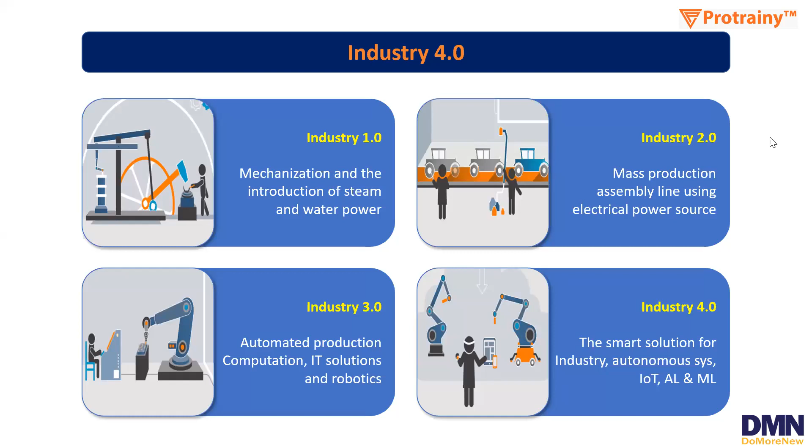Moving to the next slide. What sort of solutions are provided under Industry 4.0? We need to find out what solutions are available. That is ICT, information and communication technology, which comes with augmented reality and virtual reality. Then unmanned aerial vehicle, which comes with drones and other things. IoT, Internet of Things - by using internet, you can do a lot of things.

Renewable energy, like producing electric vehicles, making motorized machineries and everything. Then robotics and automation, big data and cloud computing, like using Google's cloud services, Azure cloud services - they come under this big data and cloud computing. Also Amazon web services and everything.

Then this 3D printing part, where we can print composite materials, lightweight and strengthening products from filaments, plastic filaments - that's called 3D printing. Then also the high-end simulations.

Someone saying something? Okay, let me continue. So then we come with - hello.

High-end simulations and analysis also comes under Industry 4.0 solutions, where we can do a lot of simulation, strength analysis, flexural strength, tensile strength, shear stress, and everything by only giving inputs, not by using real machineries. We can find out what sort of strength are applied on the body - proper UDLs, proper point loads, cantilever. We can simulate whole cantilever beams, beams, columns, everything.

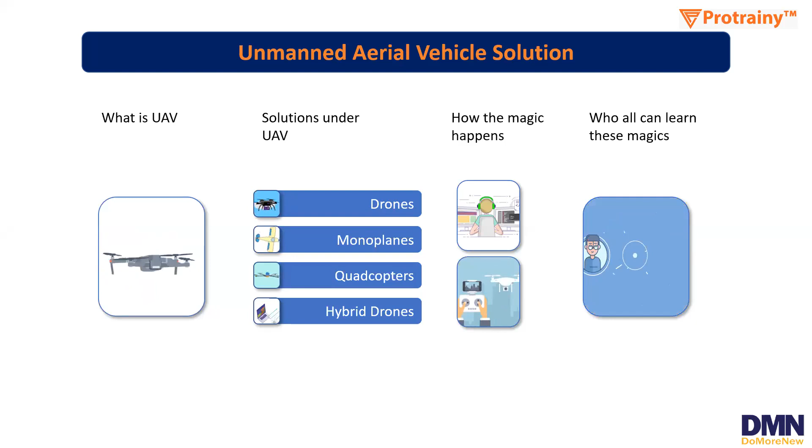Let's learn about the very important thing, that is AR and VR in construction. AR stands for augmented reality, VR stands for virtual reality. It's a good news for you guys as well. Nowadays, Autodesk and 3D Experience like from Dassault Systemes, Siemens, all these companies are integrating their software with this VR solution because they want to make the whole work very easy.

You can put it in the virtual world and show your customers how a wall will look if you hang a poster here, or how your dining area or drawing room corner will look if you put this kind of chairs, this color, in your area - all in a virtual setting. Then the person will think, yeah, this product looks very good in my room, so I will buy this. Also, in virtual reality you can generate the whole plant layout or building layout in 3D form and move into that.

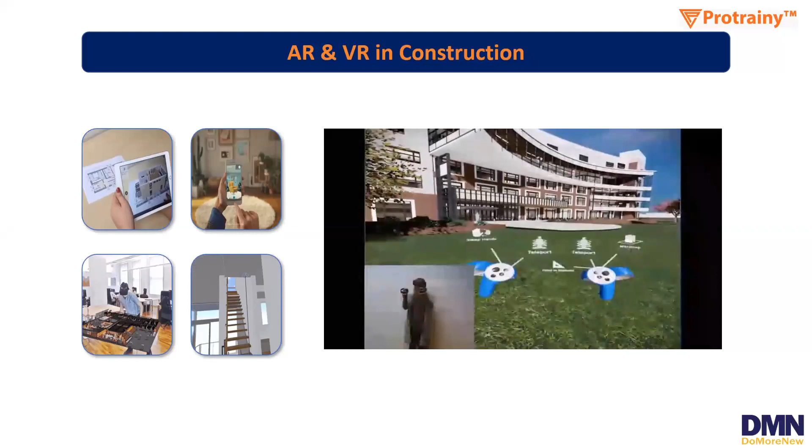These are the VR headsets which can be used to do all these kinds of virtual reality operations. You can see how they're moving inside a room, a virtual layout, the 3D model - moving inside a 3D model. It's a sort of walkthrough, but a human does that walkthrough using this VR headset, and it gives you a real experience.

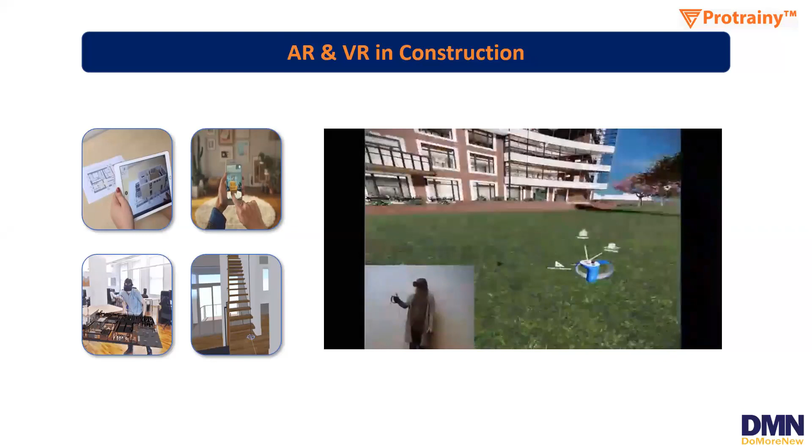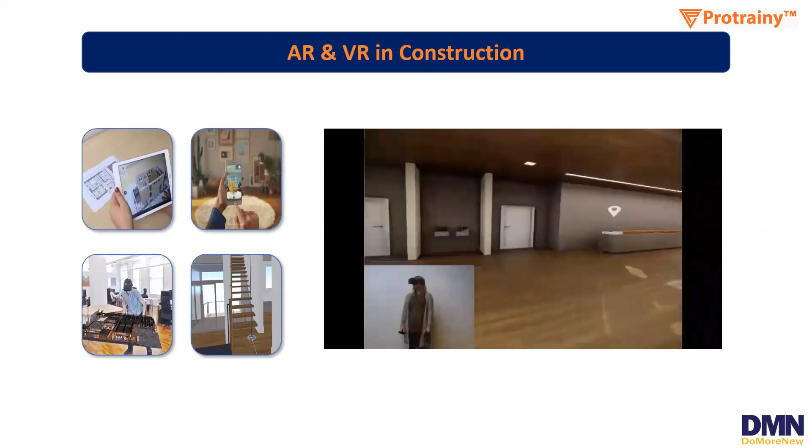See how she is moving. She's just wearing that headset, and she's moving to the community center, watching all these interiors. She can calculate or simulate - this sort of thing can happen using VR headsets - and this top view, isometric view, is looking so good.

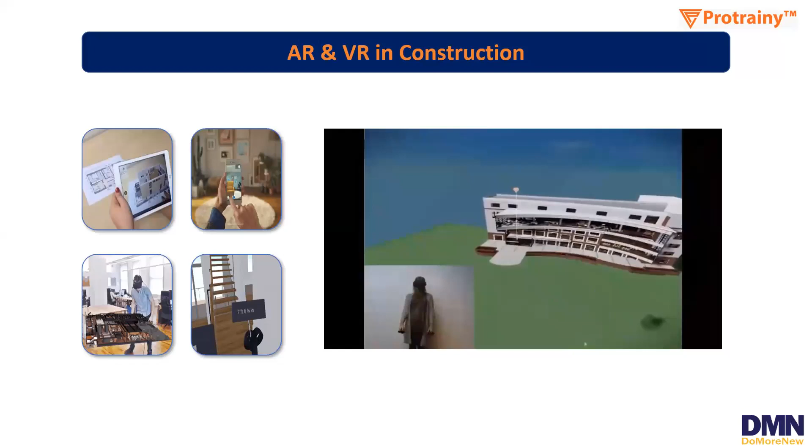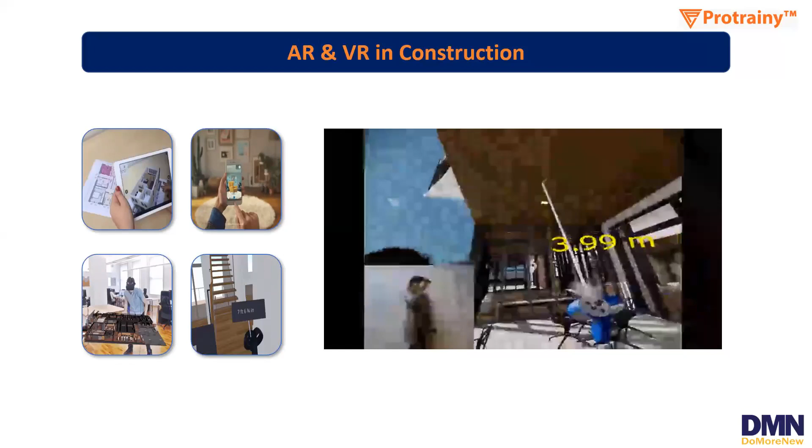Now she will do other functions, such as going into that room, finding out the wall properties, finding out the furniture properties, and measuring distances is very easy using a VR headset. You can measure the whole distance of your complete layout.

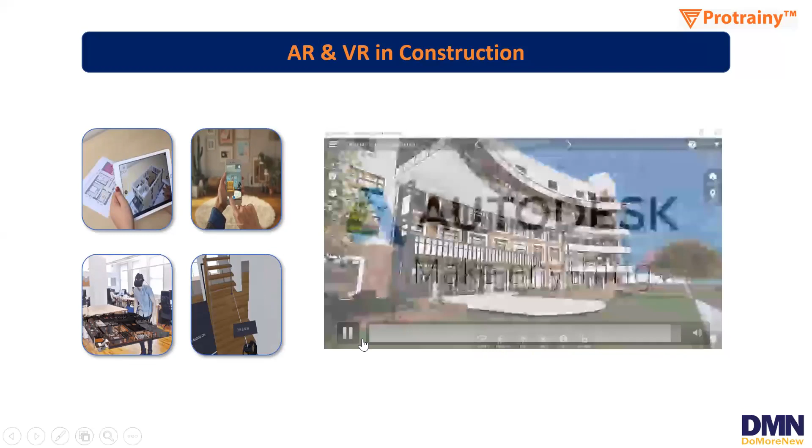Hope you guys have understood about this augmented reality and virtual reality integration in the construction part, and now how we can use drones in the construction part.

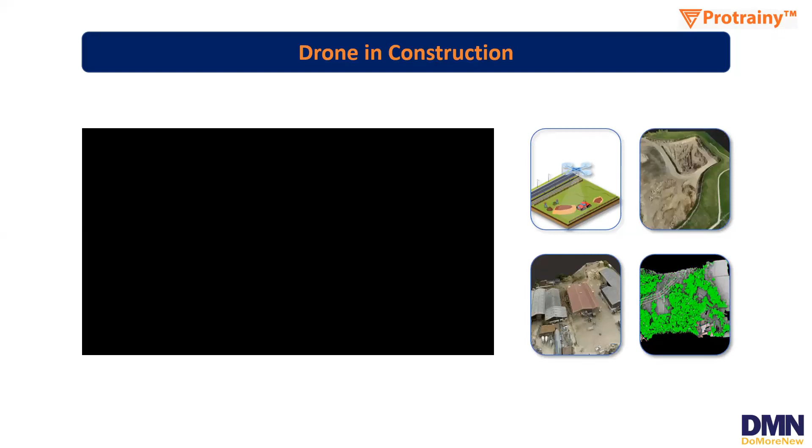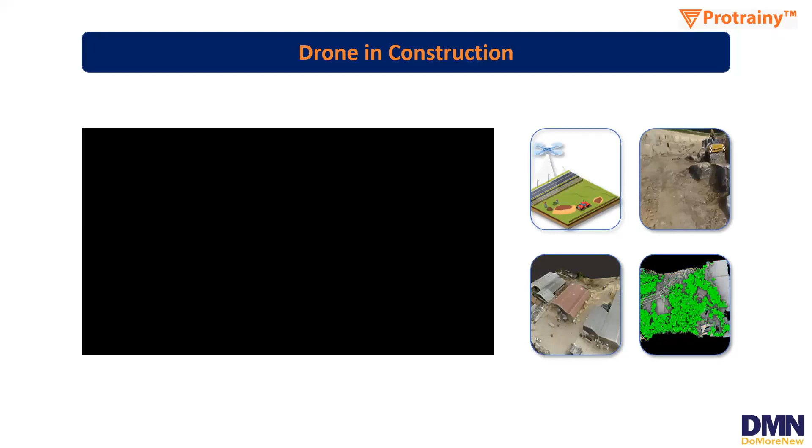What you have to do is generate a KML file. There are a lot of file formats supported which can be generated from Google Maps or Google Earth - you can generate a KML file of that area or boundary line. You input that same data inside your drone, and the drone will survey the whole 1 acre area with more ease.

You don't have to go there - you just put in the inputs and wait for your drone to land. Then the drone will survey the whole area from your inputs only, and it will generate such kind of 3D model data in your system, and you can do the modeling part and work on that.

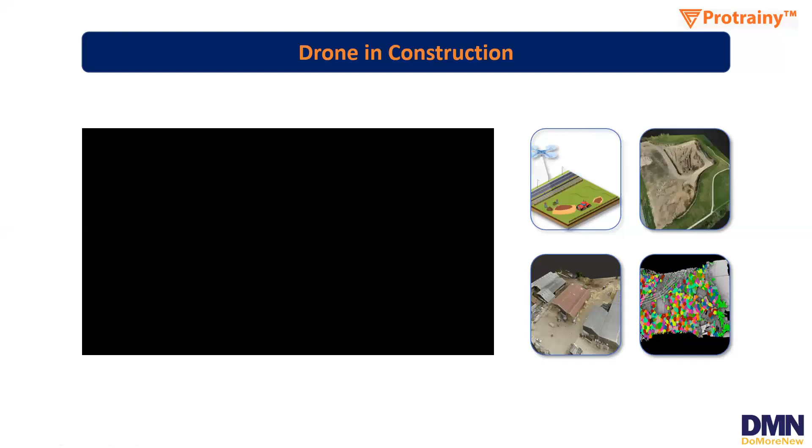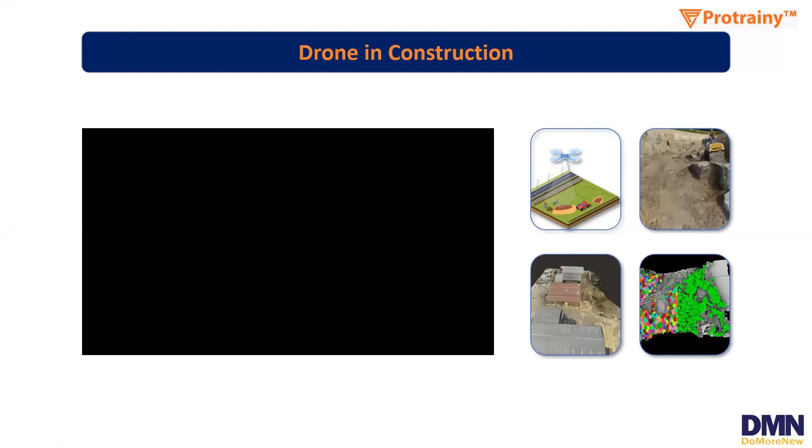You can change the building sizes, rework your buildings and everything. Also, you can simulate the forest zone, the undulated area, existing buildings, the drainage lines - everything can be done using drones.

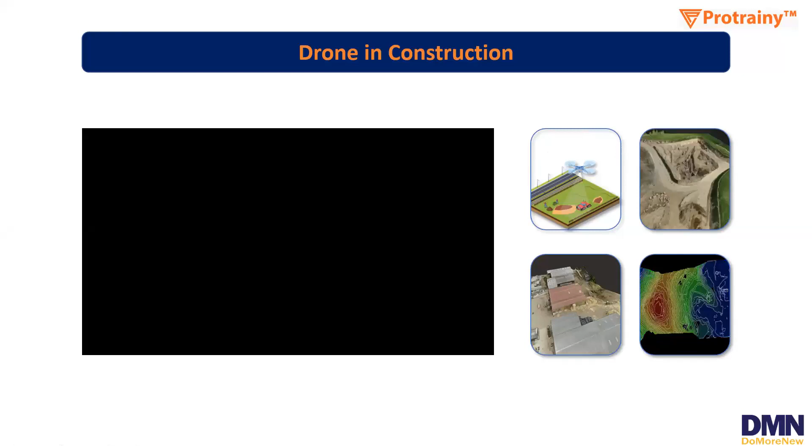There are some applications available in the Play Store and app stores to get this KML file, this KMZ file, which can be inputted into the drones, and you can find out the solution.

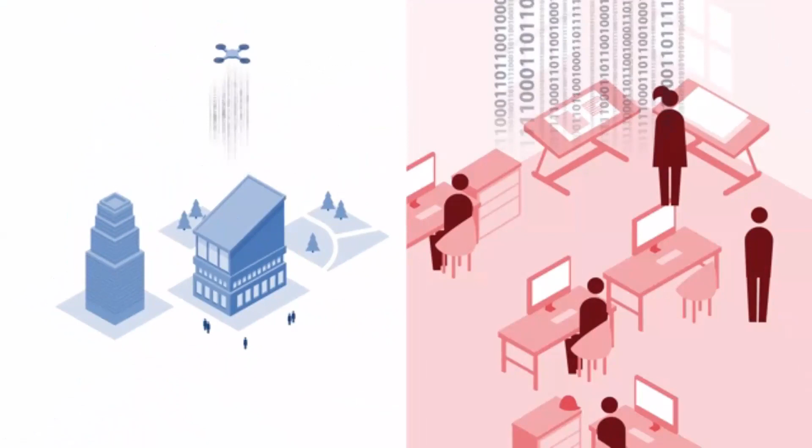See, drones can be used for surveillance work, to get the data of all the workers, laborers, heavy machineries, and the stockpiles, the materials which we have kept in the site, and to get the data from which we can recalculate our cost and do all sort of estimations. We can also see what is happening right now in our field. If we are sitting in Bihar and some work is happening in Kerala, and we want to know what is happening in Kerala at my site, you can use that drone survey to understand what is happening there.

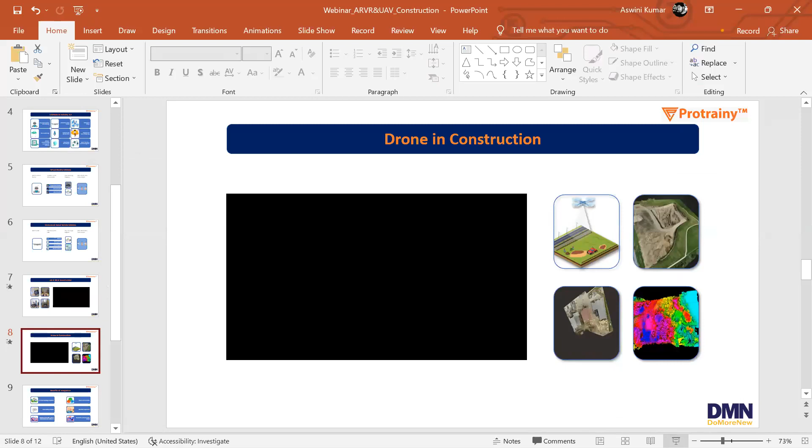Okay, let's move to the slide part. Just a second. I guess I got some issue in my PowerPoint. Just a second, everyone.

Okay, now we have understood how drones can be used in this construction field, and how augmented reality and virtual reality can be used in the construction field. Now let's discuss the benefits of integrating such technology inside our construction sector, mechanical sector, or some sort of thing. So the benefits are this error-free working ecosystem.

You don't have to panic about what is happening in your site, how your client will behave by looking at your 3D models. You don't have to get tense thinking what sort of feedback is going to come from your working procedures. You just have to sit at your place with a laptop, with a device, and do all sorts of functions and operations with just a snap.

You will develop a 3D model. You just have to put that 3D model inside the VR headset, and your client will go through the whole room and can enjoy and experience the real infrastructure or the real atmosphere. And it saves cost and time.

So it will be running based on some software, right? We have to purchase that software too, right? And how much will be the costing range, and what are the real softwares we need to work on this? There is a very good thing in this area: you invest a single time, for only one time, and this will run for a long time. The softwares you must use are Lumion, 3ds Max, or Twinmotion, or SketchUp. You use all these kinds of software.

Yeah, these are all for buildings. Actually I am a highway design engineer, so I'm working on the highway side. But I am looking for entrepreneurship opportunities, so I am open to everything.

If you want to use software, these kinds of software are now compatible with AR VR, so you can use them. Creo is also there. You can use Creo as well, no issues. So by making this and putting it in VR AR, then it works, right? That's all, right? Okay, thank you.

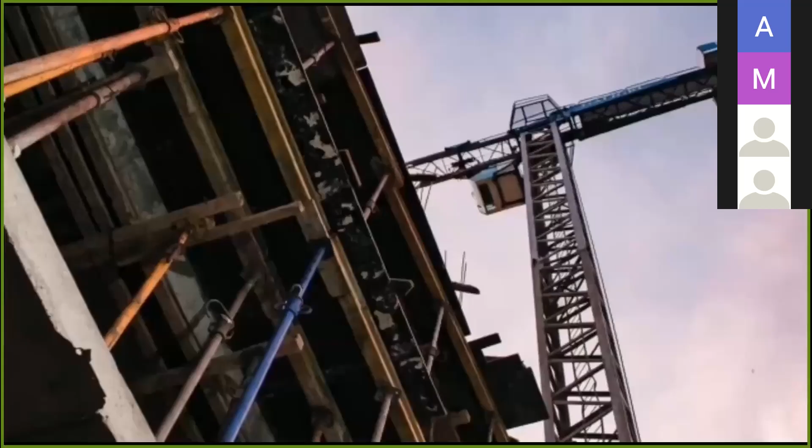Basically my question is related to: I'm a structural engineer and I want to apply this knowledge into the structural health monitoring field. So what will be the first step towards existing structure inspection, to get the distress report or output from old structures, and how can it be modeled in the software? Because it is a time consuming process. Whenever I go to inspect old structures, it takes a lot of time viewing from an external view, outside view, and it is not up to the mark either, because standing on the ground I'm not able to properly inspect the second floor or third floor.

Yeah, I understand, no issues. You can use two things: augmented reality, and the second one is drone survey.

For a survey from the outer zone, if the structure is not completed and is under construction, you can use the drone, because you can't fly a drone inside a room if it's completed to get outputs. In that session, in that zone, you can use the augmented reality feature. You can scan that area and find out what sort of problems are happening there, not from inside the building, but from outside surfaces.

For the inside of the building, there is no such technology. You can use IoT, automation, or other robotic procedures to find out that thing. But you can use the drone to survey the whole outer area of the infrastructure, and go for augmented reality for all sorts of interior works.

Okay sir, any other questions? There's a lot of questions. Training provided by you, Dinesh, how to use - sir I used to work on drone survey. Hold on, I'm hearing two voices, is it Dinesh talking to me or someone else? Yes, Dinesh. Hi Dinesh, please continue. So presently I am working on drone surveys.